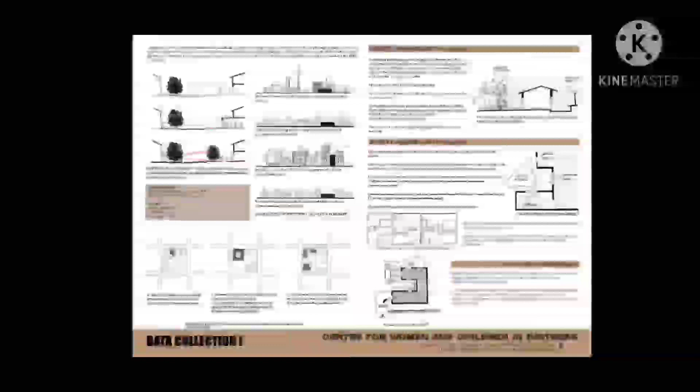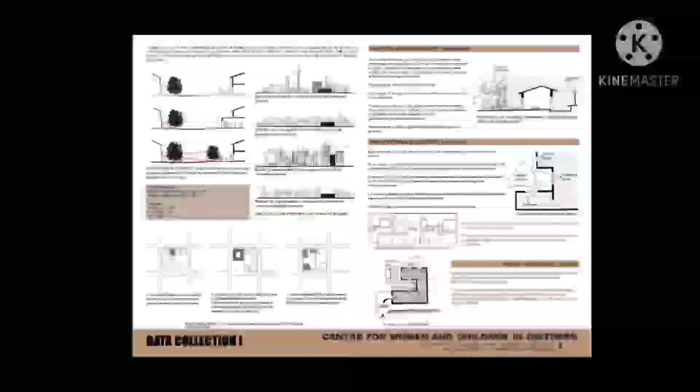So for data collection, mainly the data is related to comfort, privacy, security, and theories related to improve their mental health have been studied, like entrance buffers, where provision of courtyards and vestibules can provide privacy from the public, proper selection of the site, like residential neighborhood with proximity of schools, stores, etc., and

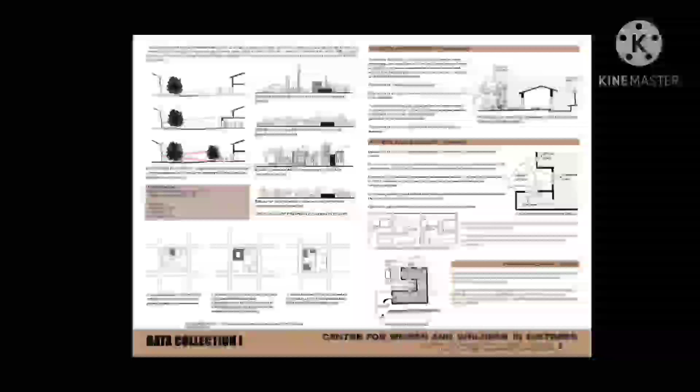building layouts. Campus formation of building layouts can be used, and how the safety and security both in exterior and interior by providing surveillance camera, well lit outer spaces, complete all time supervision from the staff can be provided, is studied.

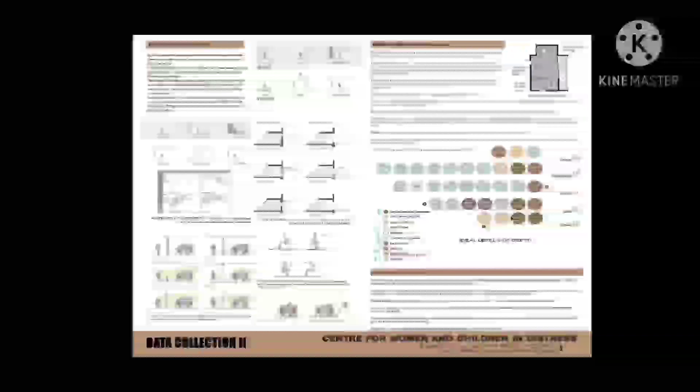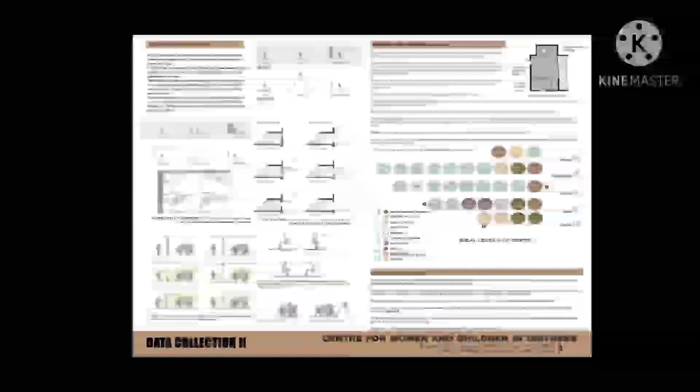And a theory called prospect and refuge theory by J. Appleton, an English geographer, where it says providing both openness and closeness in a space can bring up... Providing openness in a space makes the user feel more free and not suffocated, while providing a closed space can bring out comfort and control and security.

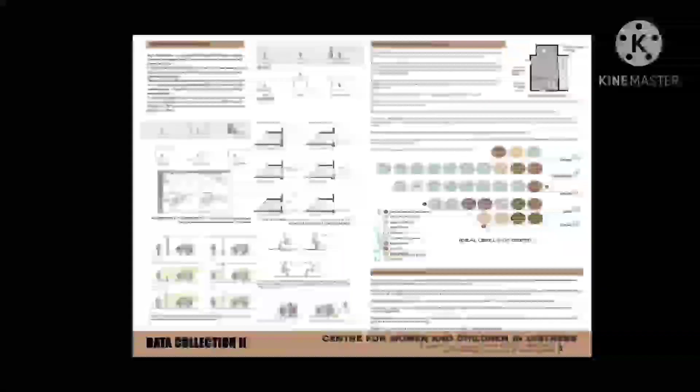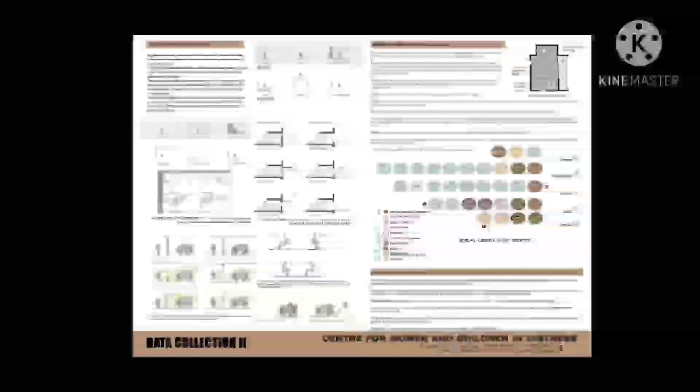So provision of both of these together can provide a balance in the building, and provision of natural daylight in the building through courtyards, jalis, large openings, and encouraging more of group activities, and the level of privacy in each space provided. All have been studied in this.

The literature case study I have done is Women's Opportunity Center from Rwanda. It's a community center for empowering women and providing job trainings. So the center has a market, administrative space, a central gathering around which classrooms are provided, a guest lodging, staff lodging, and farming spaces. So all the products that are made from the classes and from the farming are brought up to the market and sold there.

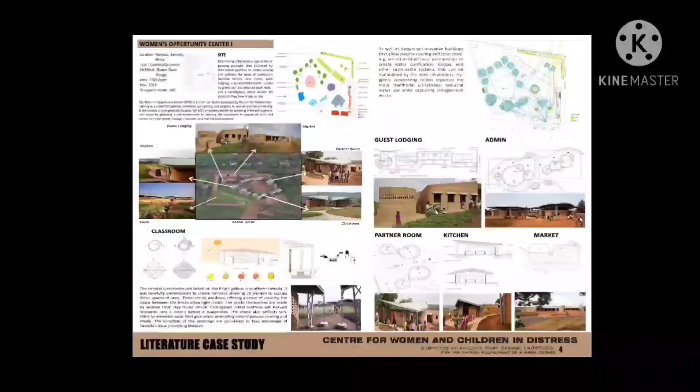And in the classrooms they are taught job trainings, and guest lodgings are provided here. They have taken up a sustainable approach to the building. They have used passive cooling, solar shading, rainwater harvesting, water purification, biogas, and hygienic composting toilets, and all sorts of sustainable approaches are taken up in the site, in the building.

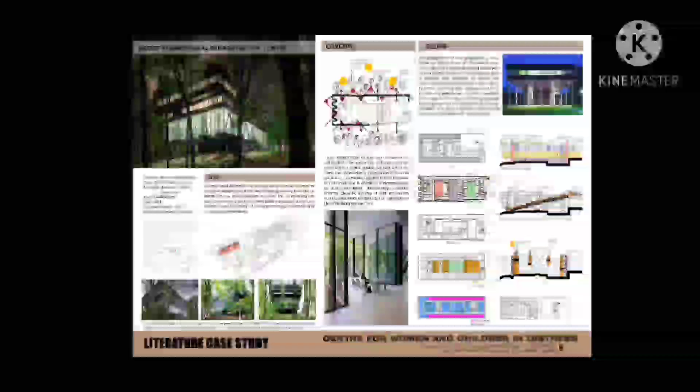The next one is Groot Klimmendaal Rehabilitation Center. It's in Netherlands. It's a rehabilitation center. So basically, it's amidst a forest. It feels like a building in between the forest, and the concept of the building was to provide transparency, continuity, layering, diversity, the play of light and shadow, and the experience of nature for a stimulating environment.

And then the design is: at the basement office spaces are provided. Then above, clinical areas, and at the ground floor, public spaces like swimming pool, gymnasium, theater are provided. And above that, clinical areas and counseling areas are provided. And above that, a charity home for rehabilitating people is provided there.

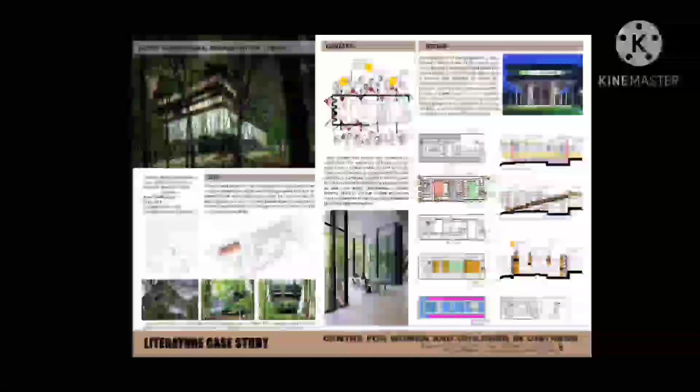The main features of the building are large openings, and making the shape of the openings so that maximum light is provided inside the building. And inner outer relationship is provided, and views through the curtain walls and everything.

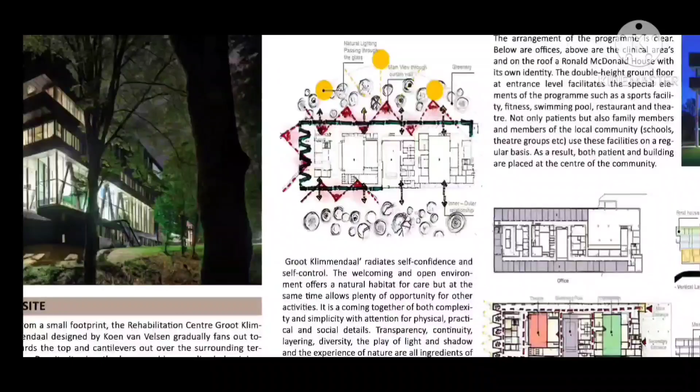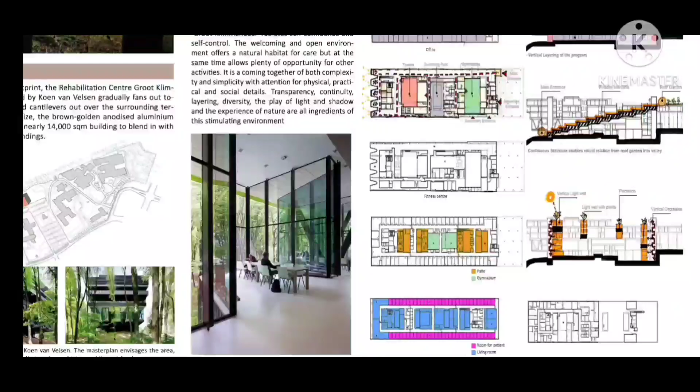And a continuous staircase, enabling visual relation from roof garden into valley. From the ground floor to the top floor, a continuous staircase system is provided so that it gives linear vision. And vertical layering is provided. And vertical light systems and light wells are all provided in there.

The third one is Sra Pou Vocational School. It's a vocational school in Cambodia. So here basically they teach cosmetics, hairdressing, machine sewing, computer repairing, motorcycle repair, handicrafts and such. And the front portion acts as a community space where the locals come for public gatherings and decision making events and all. And the behind portion is the classroom areas and the workshop areas.

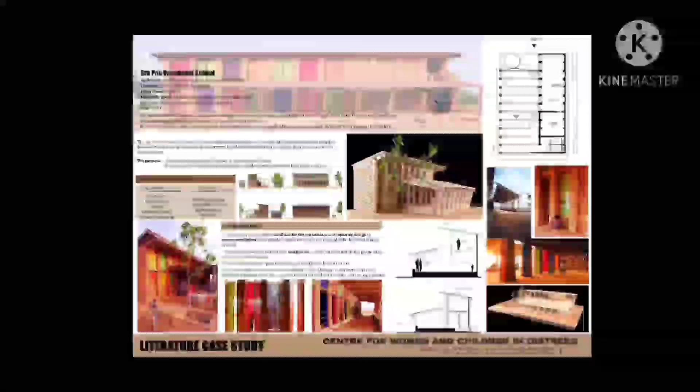In the building, small holes are provided for getting indirect sunlight and gentle wind to cool down the space. And it's made of red bricks made from local dirt. And open air design is used to ensure ventilation. And the next case study is

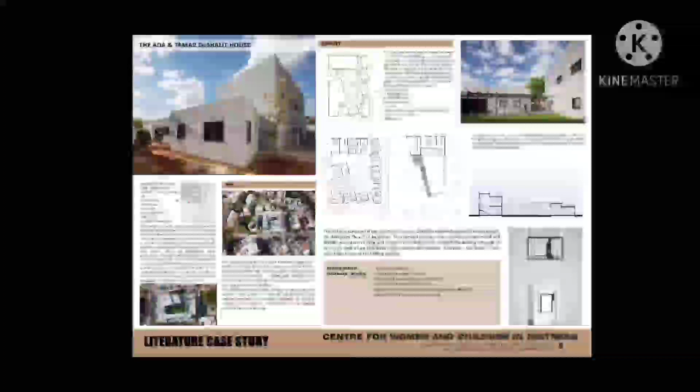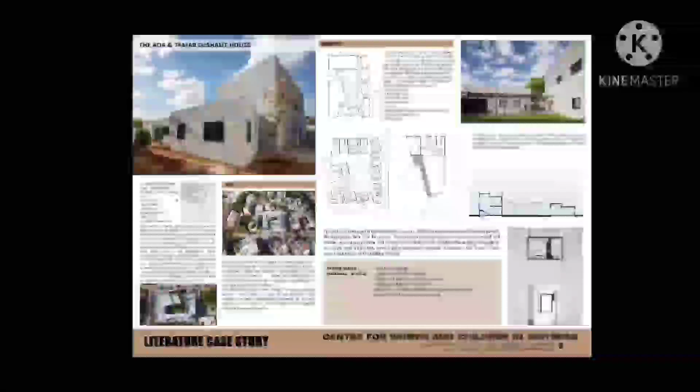shelter house in Israel. The concept of the shelter house is that the building is considered to be a small village where each family is given independent quarters, and the quarters are all connected through corridors, just like how streets connect buildings, and a courtyard acts as a central heart space.

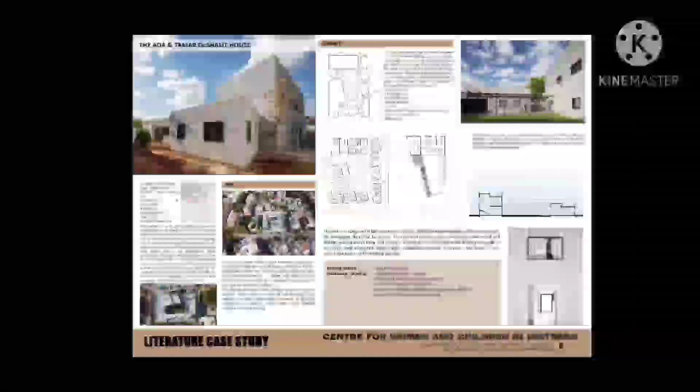It has two facades. At the exterior, it shows a protective external facade, while at the center, it provides a therapeutic central garden facade. The courtyard provides a good visual connection between the staff and the other inmates.

The live case we have done is Travancore Foundation in Kottayam. So basically, it's a residential area surrounded with thick vegetation, and the building is in the shape of a triangle, in between which a huge courtyard is provided. The site is a sloping site, so they have tackled the contour through the courtyard and through the building.

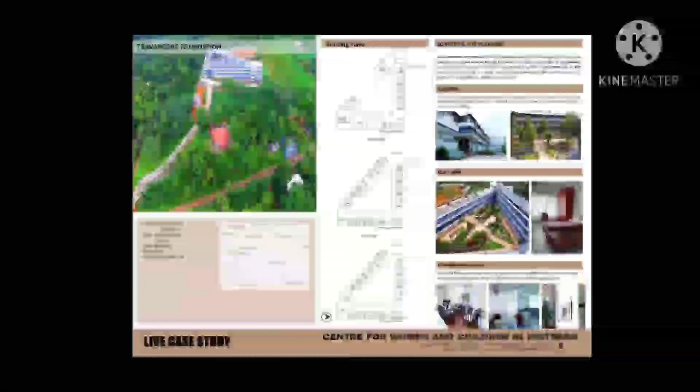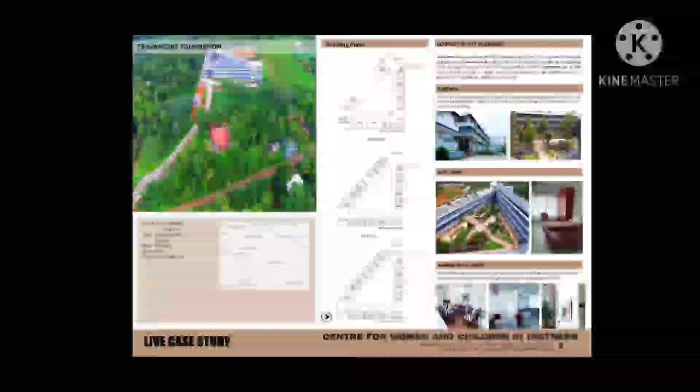And because it has a triangular shape, there is no southwest facing wall, so the building is built according to the sun direction and wind direction to enable maximum comfort. It is an old age home. It is a paid old age home, where twin rooms, studio rooms, and suite rooms are provided.

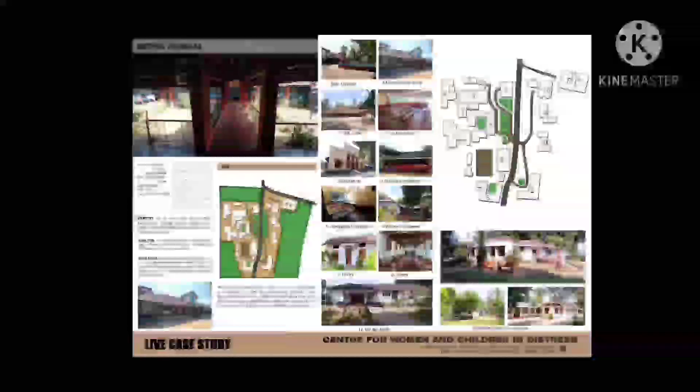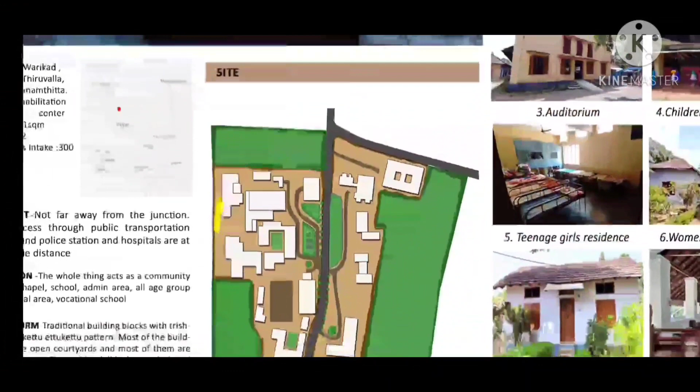This is Bethel Ashram. It is a very old building. At first the site was a single site, and then after years, the main road has been passing through the site, so now the site is divided into two portions. When one comes to the site, they reach the chapel, then the administrative area, then the schools, and then residential zones are given at the rear end.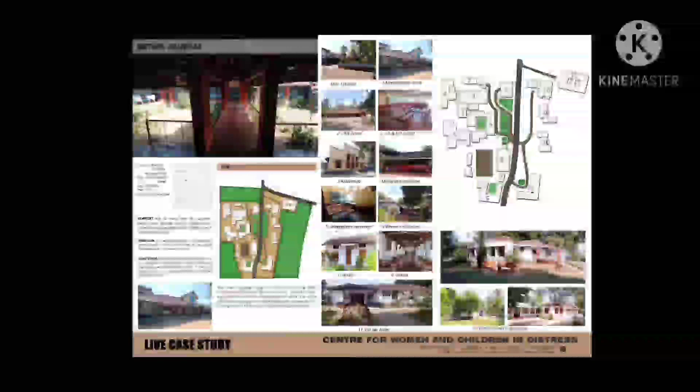And here also, since it's a Christian run institution, a home for retired sisters, an old age home and schools are provided. So it basically has campus planning, and usage of nalukettu, ettukettu and traditional roofing is done in the site.

This is the comparison study. So the inferences are: zoning should be done according to the privacy requirements, the provision of a gathering space as a focal point, human scale buildings, sustainable design approaches, good visual connections, and well lit spaces.

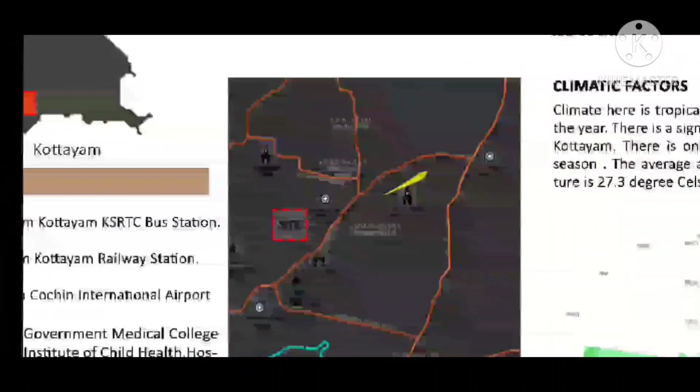This is the site. The site is located in Kottayam, and the area of the site is 12 acres. The site is selected because it is in proximity to the police station and medical college. It's in the complex of ICH, Institute of Child Health, and there are many religious buildings, schools, and public buildings around the site.

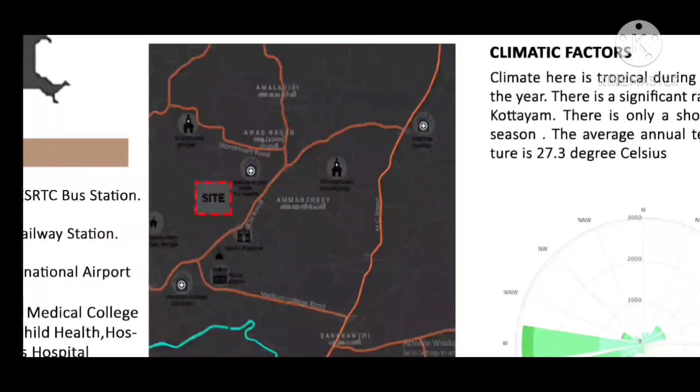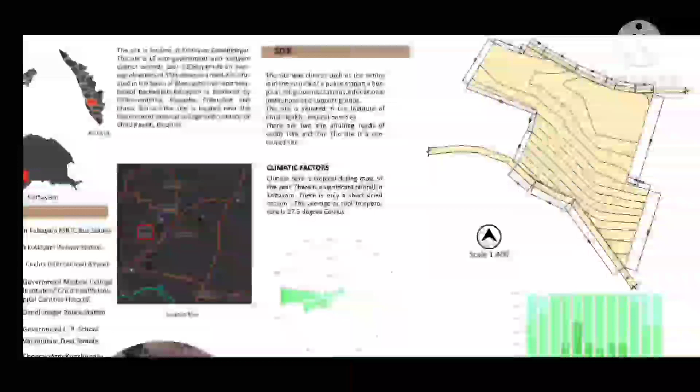And the transportation is also close. There is Gandhinagar bus station and Ettumanur railway station. So transportation wise and amenities wise, the site is in proximity to all these factors. The site is a sloped site. The difference from the bottom contour to the highest point is 10 meters.

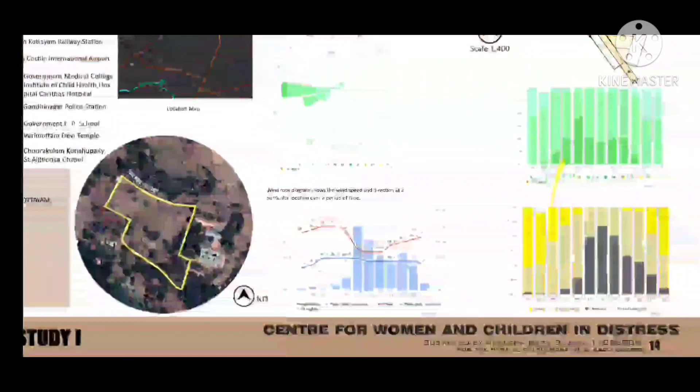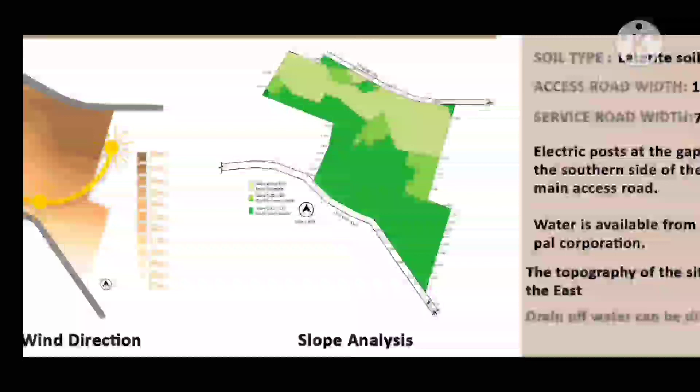Okay, so this is the wind direction and sun path, and the contour. This is slope analysis. So most of the site is buildable because the slope is in an easily buildable range. This is the main entry access road, which is 10 meters wide, and then there is a service entry road at the back of the site that is 7 meters wide.

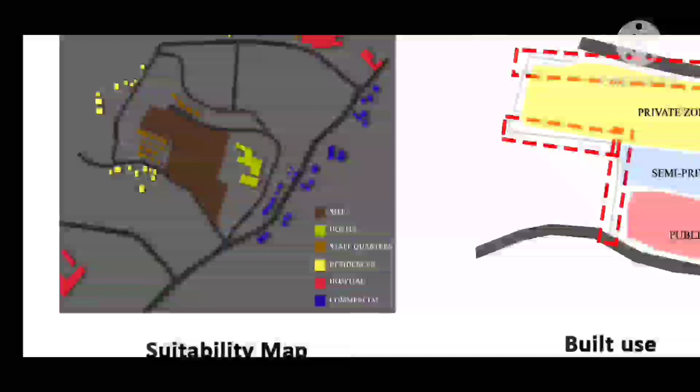And this is the suitability map. The site is surrounded by residential buildings. And this is the ICH main road, and commercial buildings are also nearby. It's in a residential area, and the ICH hospital and medical college is there.

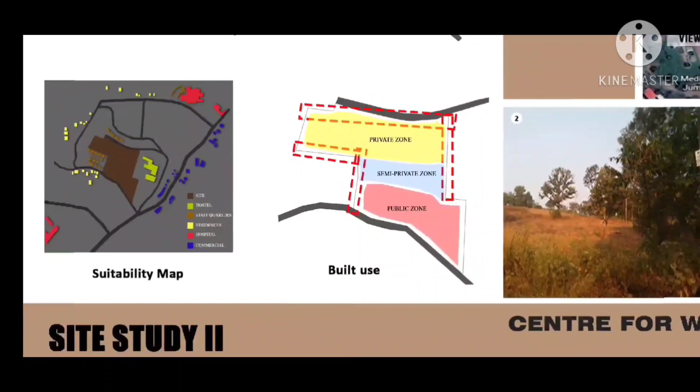This is how the first primary zoning can be done. This can be a public zone, semi-private zone, and private zone. And these are the views. This is the entry site, access road. This is from the lowest point of the site, and this is from the highest point of the site. Okay, and positioning of the buildings like this, so that channeling of the wind can be done.

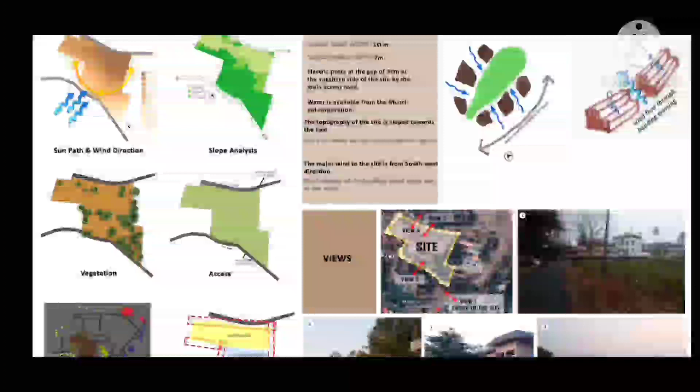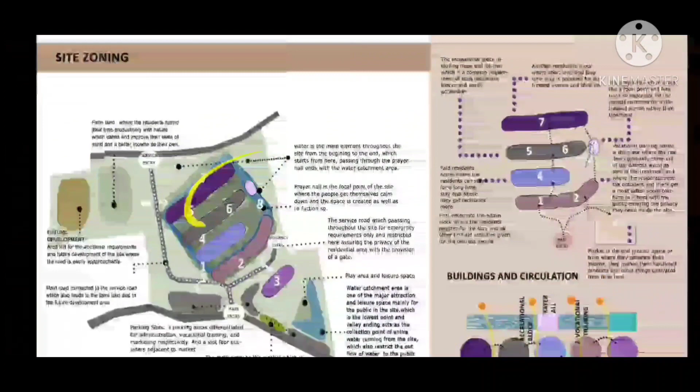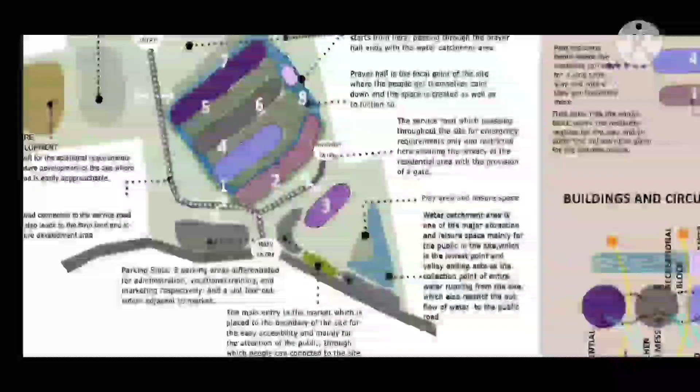And site zoning. So site zoning is basically done into public, semi-private, and private. For the public, the market is the most public building. The market has a direct entry from the road, and the rest of the buildings have to go through the main entry. So this is the market. This is the vocational training. This is administration. This is recreation and kitchen and mess, and this is the residential area. So it's done according to the privacy factor.

And the vocational is kept in between the residential block and the market block, because it should be easily accessible from the residential area, and the products from the vocational building should be brought up to the market also. And in between the residential and the administration, recreational spaces will be given, because the recreational space is given much proximal to the residents, so that the inmates can use it often.

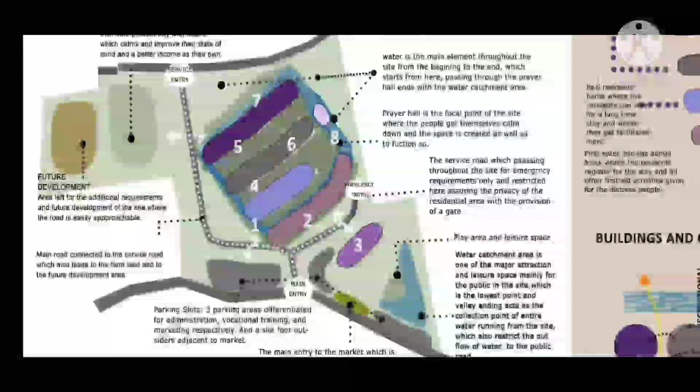The concept is the journey of healing. So it's basically architecture through pathway, where the journey is spiritually defined by a series of unfolding spaces. When an inmate first comes to the center, the person will be completely traumatized, shattered and in fear. Once they enter the center, they stay at the residential area where they slowly take time for themselves and heal themselves, and then they come up for therapy sessions, and they start to feel better.

Then when they want to start to be independent, they come to the vocational training and acquire some skills, and then they use the products they made from the vocational training in the market. So basically they are taking out their knots from each building. They open up a little more, they get better a little more by going through the process of each building.

And a water body surrounds the site, because the water body is kept as a unifying element. The water body also represents the flow of the inmate. It flows from the top of the site, that is from the residential area, to the recreation area, then to the vocational area, then to the market, and it ends up at the catchment area where the end product of everything comes up to. So through the water body also, the journey is shown.

And the usage of jalis: with the residential, it's a much smaller and closed-up jali, and that represents how messed up their mind is at that stage. When they come to the recreational zone, the jali opens up a little bit, and when they come to the market and administration area, the jali opens up even more, representing a much more reformed and clear mindset. And the usage of courtyards and water body enhances the sensory experience of the building.

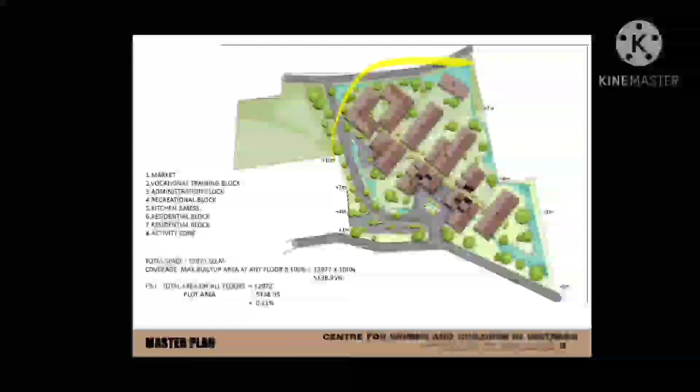Once they enter the site, the vehicular entry is restricted to this portion, and the rest of the area is pedestrian zone only. And the water body is covered on all sides, providing a barrier without making it into a real barrier, like the water.

From the entrance, the first buildings that a person reaches are the admin building and the vocational building. And from the vocational building, through the spine, the rest of the movement happens. A service road is also built, and the road is connected to the service road, so that any service entry can be moved through that road.

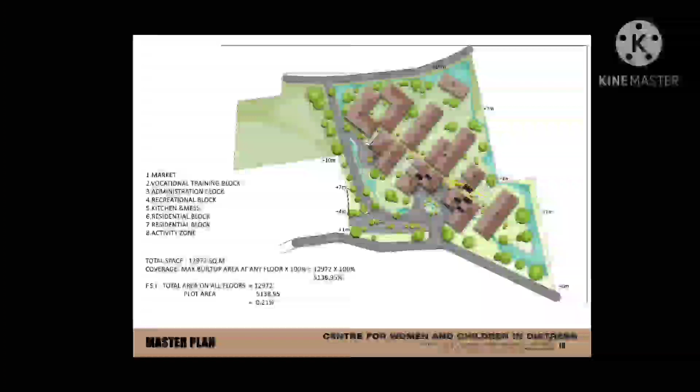And the buildings are all designed in a way to create a homely environment for the person, so that the first thought that comes to mind is to make it look more homely and more comfortable, as well as make it as functional as possible. The spine is designed as disabled friendly also. Ramps are provided through the courtyards, which are connected to the spine, and can be used.

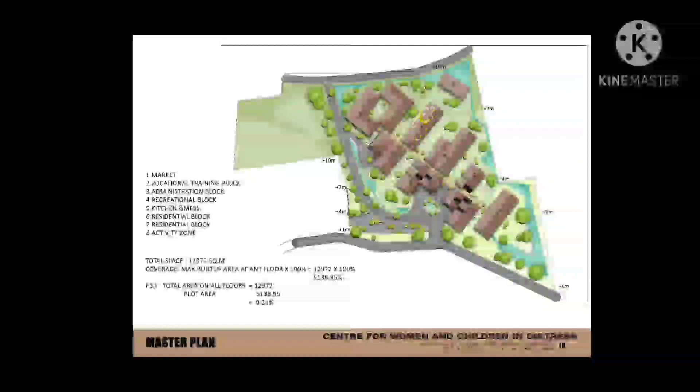After reaching the entrance point, a client will first come to the admin, and then the user will be taken to the residential sector. After they get settled in, for the therapy sessions they'll come to the recreational area; this one is the recreation area. And once they reach a point where they are ready to learn new skills, they come to the vocational training center, and the products made there will be brought to the market.

And this is a space that overlooks the water body. It is positioned as a deck, where the residents can come and relax and read a book or anything. So this is the basic site master plan.

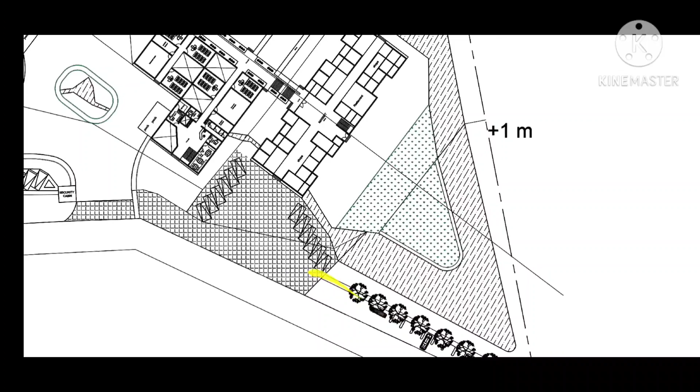This is the site plan showing the detailed spine drawing and all. From the road, a vehicle can come to the market. This is the entry point of the market, and from the market, the people who are using the residential sector can use the spine to go to and fro. And the public can come through this portion and this portion also.

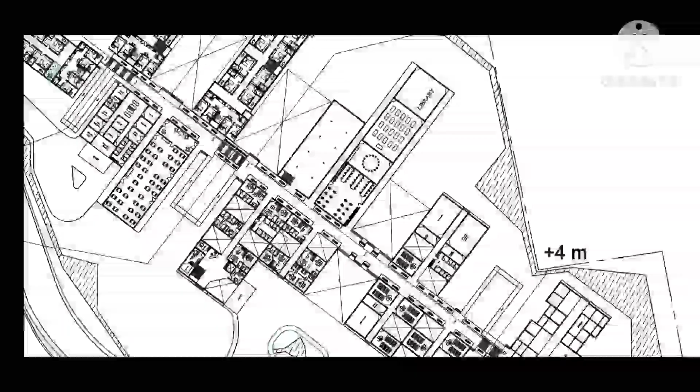The ramp is also provided such that it can move along like that. And each corridor is connected to the spine. This is the admin block, this is the vocational block, and this is the recreational block. Courtyards are provided in between, providing a closeness and openness. And courtyards are provided inside the building also, providing the same effect.

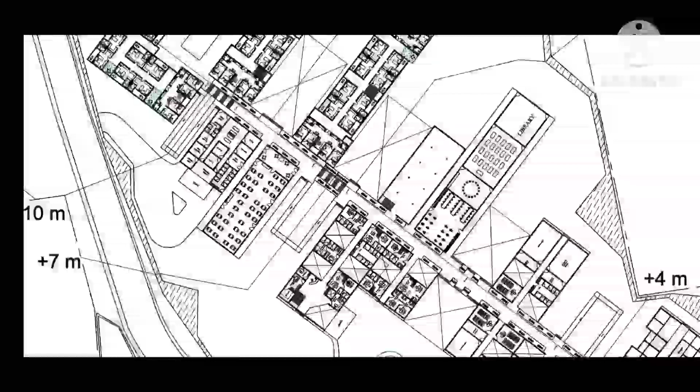Each courtyard has its own character, using sensory architecture and sensory features. One courtyard shows more focus on the sound feature. The next courtyard might have a garden with flowers and plants, so that it helps in sensing through eyesight and smell. All courtyards have their own special features.

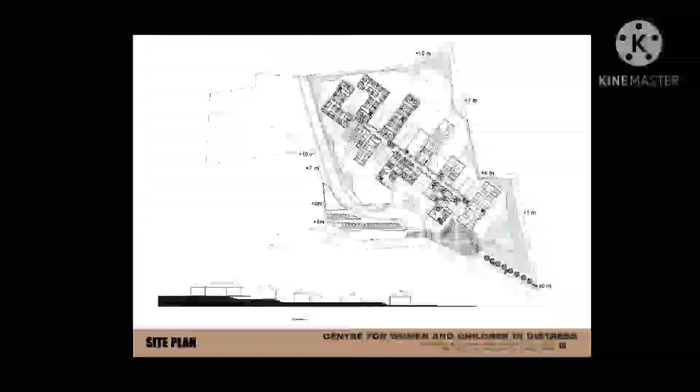The site is cut down into terraces. At first, this water catchment area is at 1 meter level, and from here also it's 1 meter level. A vehicle will come on a slight slope and come back to there. Here it's the highest slope, and this is the lowest point. Then from there, each terrace is 3 meter height, such that at the end it's 10 meter height.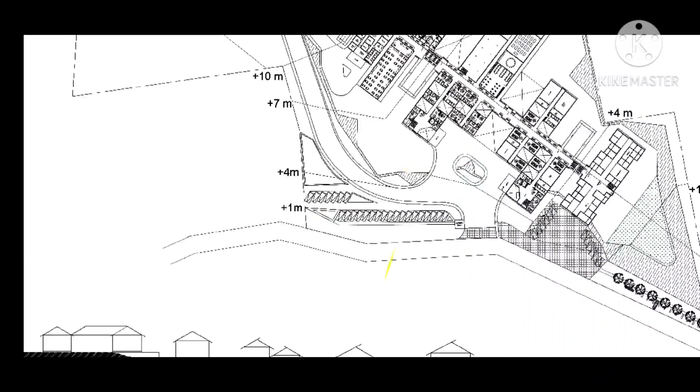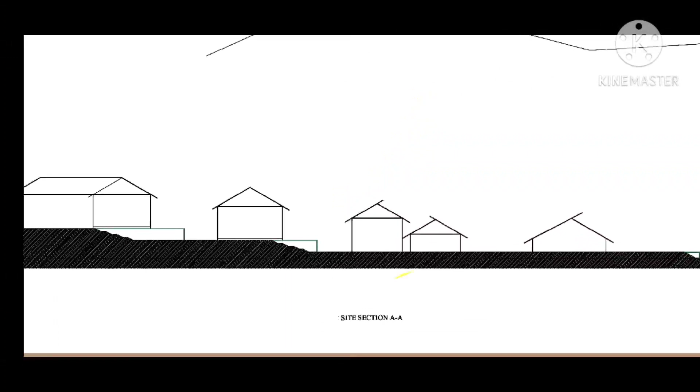This is the site section. This is the residential block, this is the market block. This is the administration block. From the porch, the first reception is there. The office spaces are given at the front portion, and through the corridor, the emergency treatment area, social worker room, and a social welfare department. Small offices are provided.

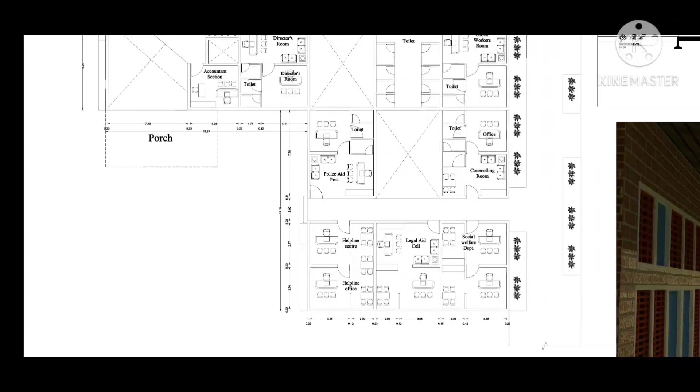And here, a helpline center, legal aid cell, a counseling cell and a police aid post, everything is provided, so that all official works will be here, which helps the victim also. All first hand support systems, all first hand necessary things are done in the administration block. This is the section.

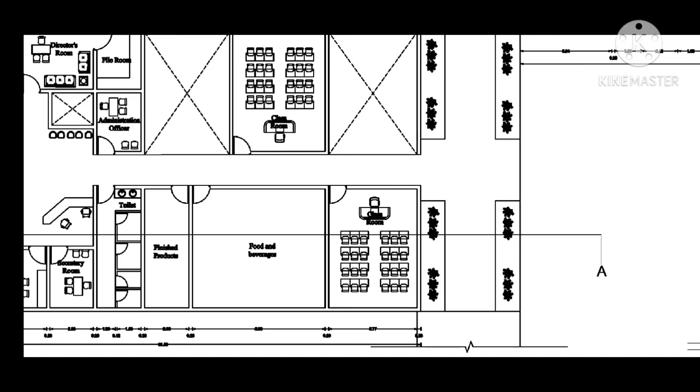This is the vocational training. This is also from the porch. There is the reception area and then office spaces. Then there is different workshops and classes, like food and beverages, handlooms, handloom studio, product weaving studio, all those studios. Then there is art studio, soap making studio on the upper floor.

This is the recreational block plan. So this is the ground floor. So there is a veranda space here, and from the veranda, an art therapy room is there. So they'll come at this place, and they can draw whatever they want. It is a type of therapy that releases our emotions to the paper.

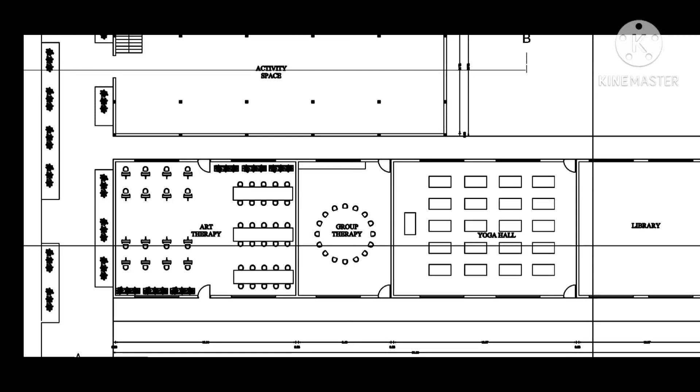And then there is a group therapy where they sit around and talk their problems out. Then is the yoga hall, where they'll be doing their yoga, and the library. And here the building above it is on stilts. So this place is used as a garden space, open space where they can come and sit and use it as activity space. They can come and talk, they can come and read a book or anything.

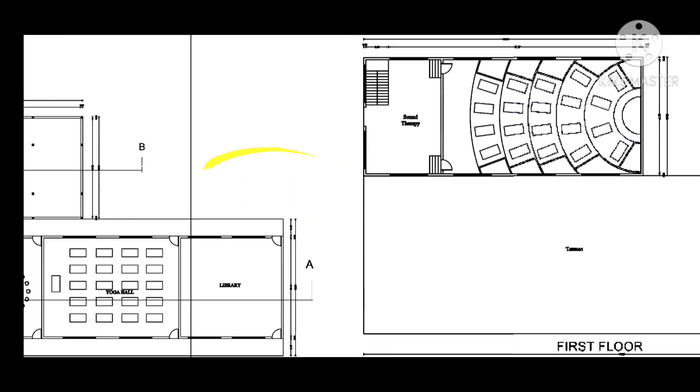And this is the upper floor above the stilt, and this is the sound therapy room. So a practitioner will be sitting here, and music bowls will be kept here, and the inmates will be lying down here. So when the practitioner uses the music bowls, the sound will be heard all around. This is how the section comes up, and this is how the section of the ground floor is.

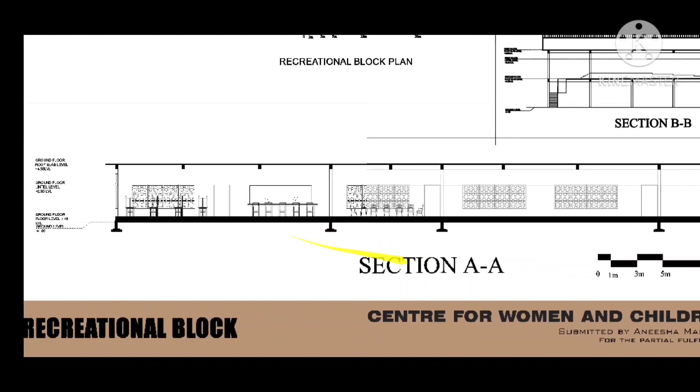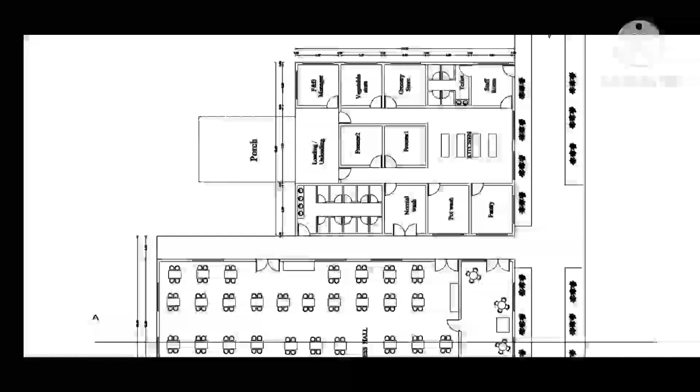This is the kitchen and mess floor. A common space is provided here, and a common mess hall is there, and the kitchen, landing from the porch, loading and unloading space, and the food beverage manager, vegetable store, grocery store, freezer, staff, pantry, wash, all are provided.

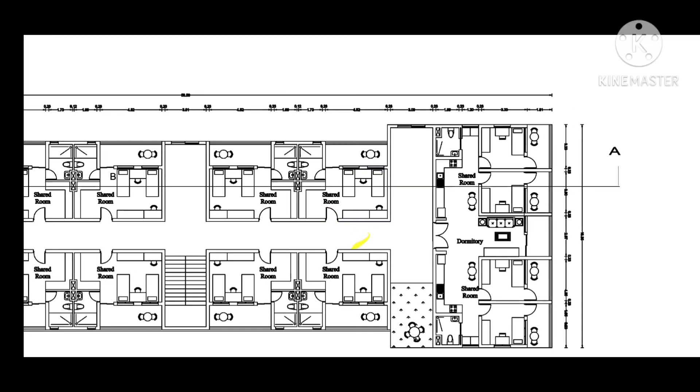This is the residential block. The residential block mainly has two types of room layouts. One is dormitory, where they have common area, and then rooms are shared, and the twin bedroom layout. So when an inmate comes first, they'll be given a twin bedroom, so that they have their own privacy, but still there is somebody always with them. And once they start to interact with the other people, and they start to be more social, they can be taken to the dormitory, and they'll share the spaces like that. And yards are also provided for them to have activities there as their common space.

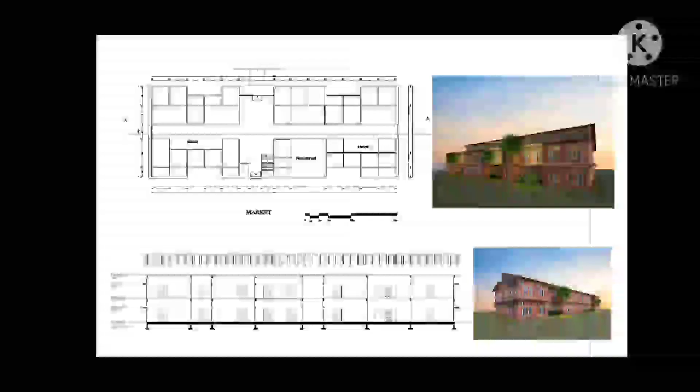This is another layout of the residential block itself. Same dormitory spaces are given, and twin bedroom spaces are given. And this is the market plan and section. The market shops are given on both sides, and on the upper floor, banquet hall, conference room, and all are provided, so that public can also come and interact in there.

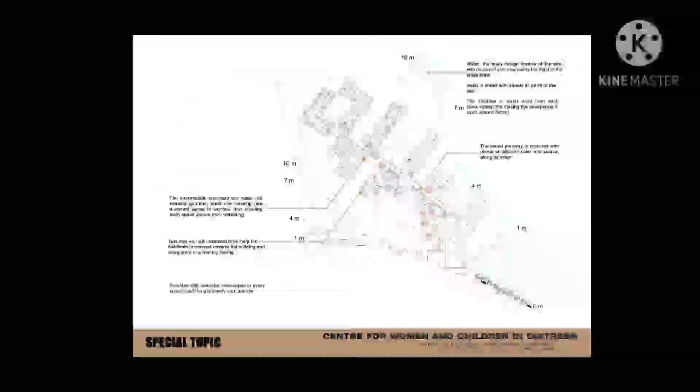This is the special topics. My special topic is sensory architecture, so the integration of all senses into architecture. That's why I've used water as a main design element in the site, because it enhances the sight, sound, and it calms down the mind of the inhabitants. Water is linked with almost all parts of the site, and the distance of the water body from each block gives sound variation, making it an experience.

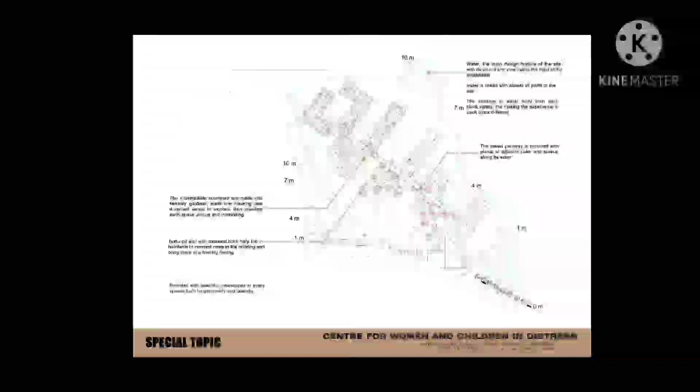And the spinal pathway is provided with plants of different colors and scents, so it also enhances the sense of smell and color, eyesight. And then the intermediate courtyards are made into sensory gardens, each one having a dominant sense to explore, thus making each space unique and interesting. And textured wall with exposed brick helps the inhabitants to connect more to the building and bring more of a homely feeling. Beautiful viewscapes are in every space, both